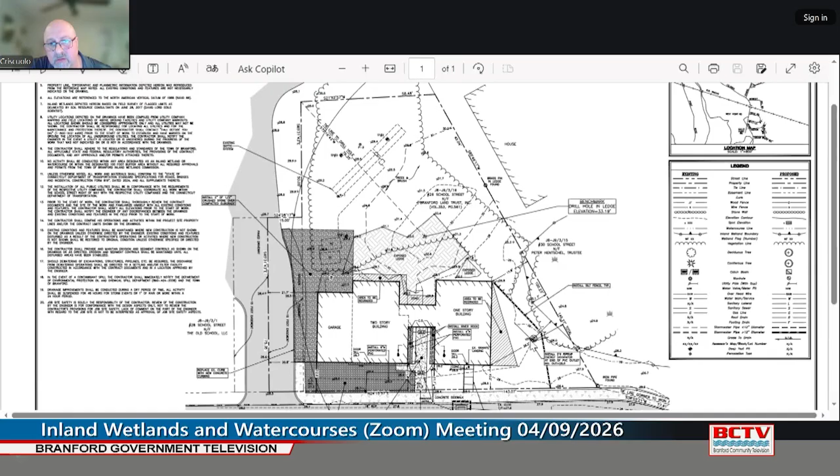So what we're planning on doing is putting a landscape stone strip, or more of the Stony Creek gravel stone strip here with a perforated pipe underneath, which will connect to a perforated pipe underneath this gravel area here, which eventually runs down and outlets over in this area adjacent to the wetland.

Now this pipe sits in a crushed stone layer, and it's flat through here, then there's a quarter inch pitch through. So these stone layers have to saturate and fill up before it finds the holes in the perforated pipe, and then kind of works its way down to the end of the PVC, and we'll have a riprap, like a bowl so to speak, a riprap energy dissipator, so there wouldn't be any erosion at the end of it.

Truthfully, during this saturation time, when the stone has to saturate for the pipe to start to flow, some of it will be getting into the ground as well. So I suspect there will actually be very little coming out of this pipe.

But we did do a drainage analysis that analyzed the whole affected area of the site, basically this whole front half of the site. Some of it goes this way into this gravel and always has, and into the driveway over here.

Some of this area did drain off from the curb cut into the road, a very little piece of this driveway. And then again, this area in the front here and a little bit right up against the back of the building would kind of run around the building and over here.

So the net of all that, when I ran hydrographs pre versus post and added them back together, the net is we're actually reducing the runoff here.

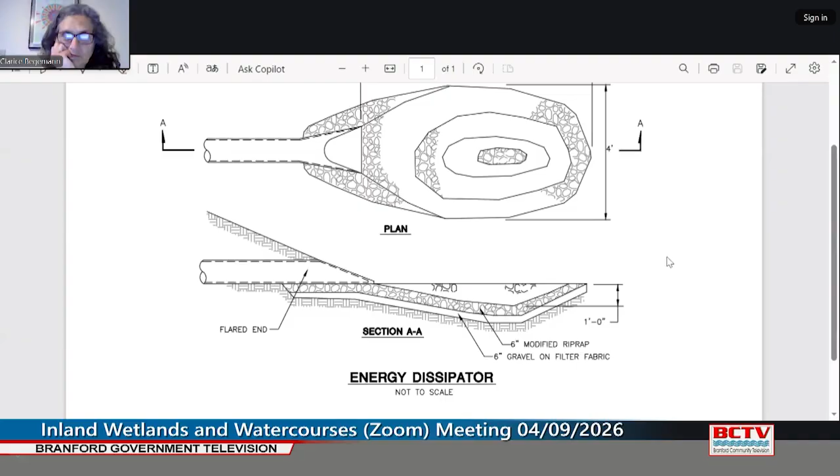This is the detail at the end of the pipe. There'll be a riprap bowl, more or less, to break any energy coming out of the end of this pipe. Again, we expect very little flow.

Where did I go? There is one other interesting thing I found today that I did want to share. Share screen. Share screen. BLT. This is a map from 1980.

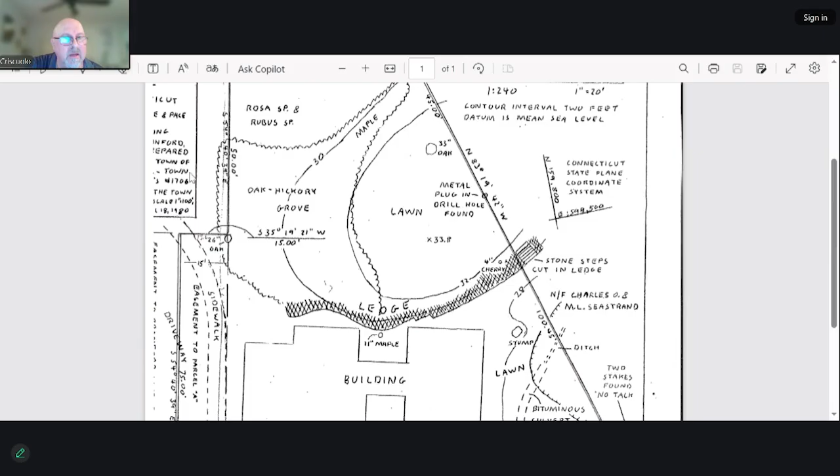It was cut off, but you can see it was 1980. I think it was done by somebody in the town - it might have been the town engineer at the time - but this was the building. You can see the ledge in the back and the property line over here.

But here, interesting to note, this may have been before they put the drainage in the road, but there was a bituminous culvert that ran right in that same area from the road into a ditch and then into that wetland area on what was Sea Strand property, what is now Hentschel.

So we're talking about very little flow, an area that had historically been disturbed, and it doesn't appear that we're going to really have any negative impacts at all on that wetland area. And I guess I'll take questions, because you have heard some of this before.

This is Commissioner Baskerville. Is there an easy way to describe the change in the direction of the drainage from what is current to what is proposed?

Can you pull the site plan back up? That will help. Yes, thank you, share.

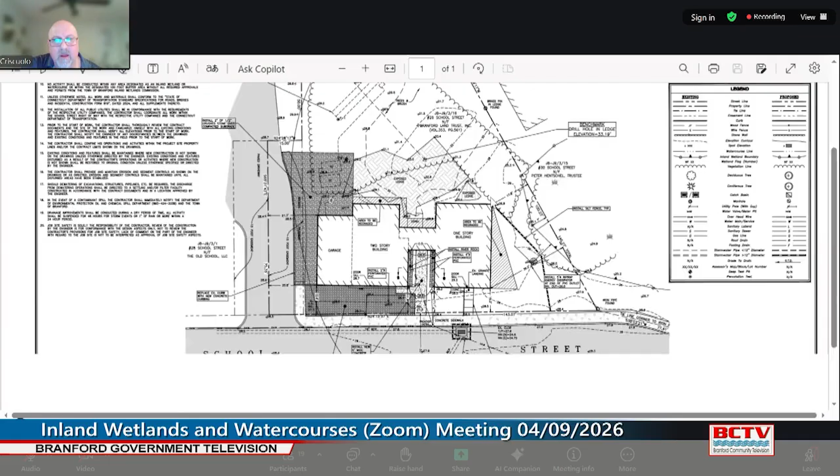I do have a roof plan, but there's a ridge that runs down this building here, and there's a ridge that runs down this building here. So the left half of this all runs to the left, and this portion here all runs to the left. The only gutter on the building currently is right here, and there's a downspout that discharges into that stone area.

Again, this is the same thing. There's a ridge that runs through here. The right half of the building already runs this way without any gutter and kind of runs off in that direction. This piece in the middle is a single slope, so you have a little bit of roof on this side and a little bit on this side that drain onto it and then runs into the back.

They'll get a little bit more. On the document in OpenGov, the sheet I'm looking at is 1 of 2, but I don't see a 2 of 2. Oh, I'm wondering if it was mislabeled. There was a 1 of 1 drainage and a 1 of 2 - they were mislabeled.

But the 1 of 2 has some red designations on it in terms of direction. And I didn't see that on the site plan I'm looking at. No, that was just for the drainage report. I don't think I have that with me. Jamie, can you put that on the screen?

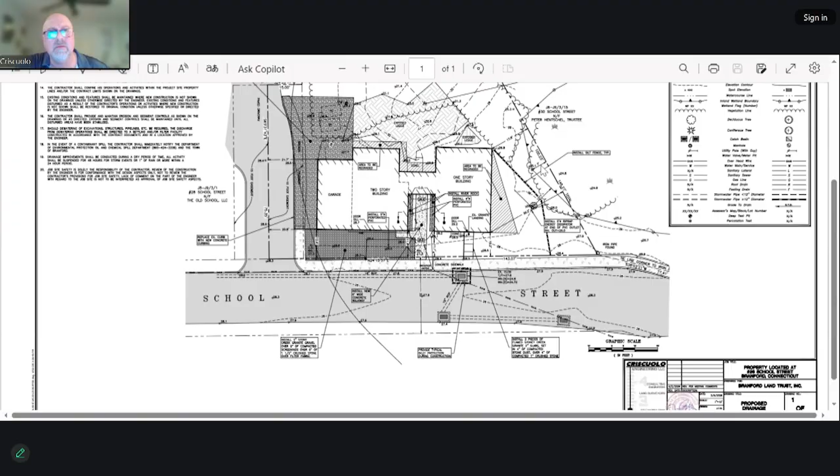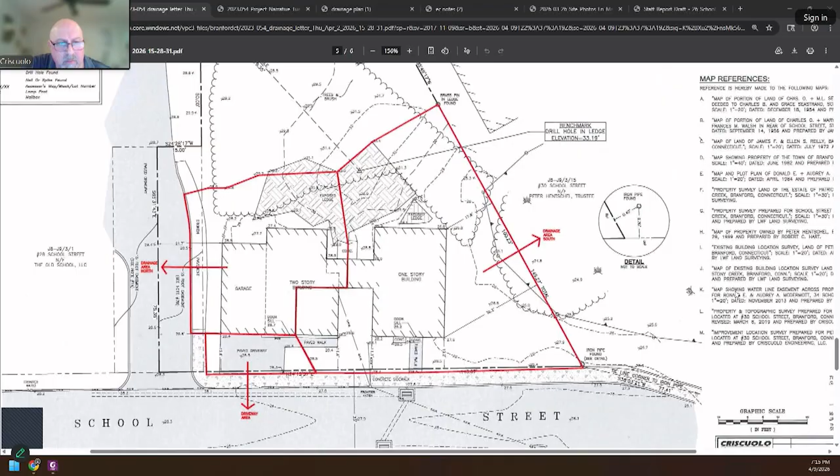Basically, where that bridge piece that connects the 2 buildings is, that ridge really runs right up to the back of that building and kind of splits it. So whatever runs off on the left side goes around to the left, and whatever runs off on the right side runs down to the right.

Commissioner Baskerville asked: are we changing the roof peaks? No, we're not doing that. It's just because they'll be adding a gutter on the back of that connector piece, that they'll be grabbing a little bit more roof that'll be going to the right instead of the left - only about 50 or 60 square feet difference.

Gotcha. Okay, thank you.

This is Commissioner Boda. Where is the energy dissipator on the site plan? The bowl? If you go to the next page, it's right there, in an area that's already lawn right now.

So we're not taking any vegetation out here. This is Commissioner Boda again - so that is the primary thing that is the driver for the permit.

That's correct - that, and the triangular area there. Actually, because of how small this site is, the whole site's basically in the review zone. But that footing drain outlet, or under drain outlet, and a little bit of filling they're doing up against the building - because there's a depression up against the stone foundation that collects water before it spills out and creates moisture problems.

And then the little hatched area in the back is just some local grading to try to get the water away from the building.

And then in the front, they're taking the pavement out that exists and putting in Stony Creek crushed stone, which will have other stone layers underneath it to make it drivable. So they're making it more permeable, because we're putting 6 inches of stone where that PVC is going, and the amount of stone just in the front is about 120 cubic feet of storage that doesn't exist now.

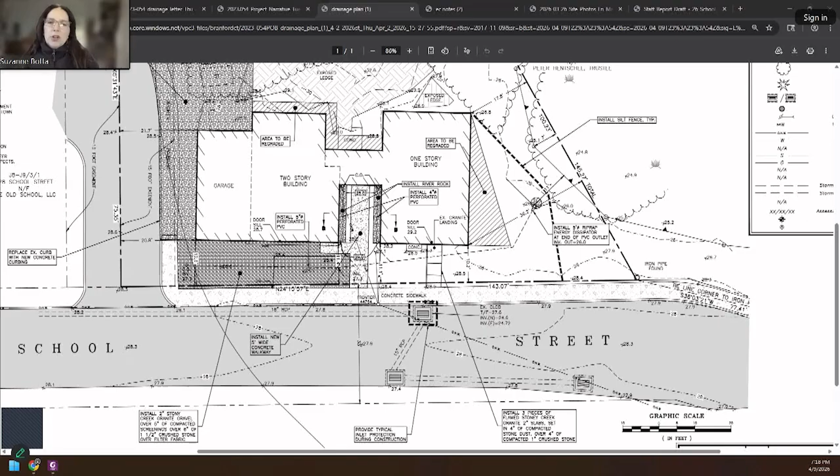And this is Commissioner Botta. What is the distance between the discharge from that bowl to the edge of the wetland, and then it looks like there's a tree line in between?

Is that correct? Yeah, there's some vegetation in that wetland that kind of crept out. At some point there was quite a bit of Phragmites there, but there's some other brush and stuff in there now. I think they tried to mitigate it. I think Mr. Henschel tried to get rid of the Phragmites over the years, but you could see it. The hole in the front here is, I think, because they were trying to get under the building, but farther on there were always these depressions, because I think it was washing under the building or something.

This is Commissioner Bassermann. I believe when you talked about the sidewalk, Mr. Preddy, you said there was a lip along the side closest to the building. Is that preventing flow to the sidewalk, or does it look like the topography slopes toward the rear anyway? If you look down the sidewalk there, past the pole, you can see that whole area drops to the left, and then the sidewalk's dead flat. So nothing's really going over the sidewalk there.

And to that grass area just before Peter Henschel's barn, or garage, the whole area there, that grass area is very flat, but it does eventually run toward the south, toward that wetland, after it saturates everything.

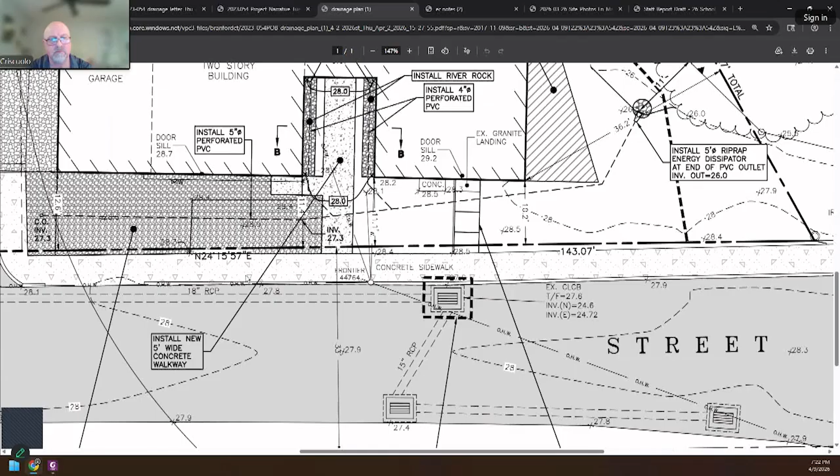This is Commissioner Bassermann, any other questions for Mr. Preddy?

Jaymie Frederick, Wetland Agent. I'll just request that we receive a copy - if you can email Olivia or myself the detail for the outlet structure and the map from 1980, so we can add that to the file. That would be appreciated. Yeah, the detail I'll put right on the plan, Jamie, but I'll send you the other map too. Okay, thank you.

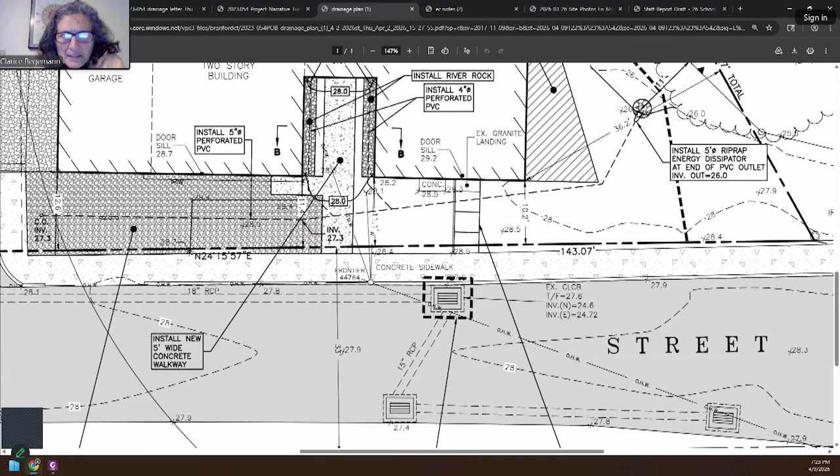This is Commissioner Begemann. Jaymie, in your staff report, did you mention something else about another silt fence? Not this staff report. Okay.

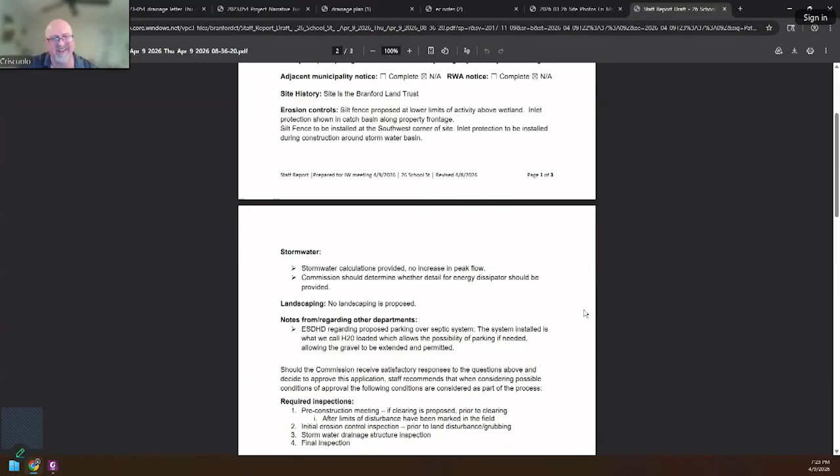This is Commissioner Bassermann, that's actually a good segue into the staff report. You want to bring that up, Jamie? Sarah, are you seeing it? Yes, we are. All right. Jaymie Frederick, Wetland Agent.

I'll kind of skip over what I feel like we've already gone over. We do have the silt fence. There is the inlet protection proposed for that catch basin we were just talking about. We've received the stormwater calculations the commission requested at the last meeting. No landscaping is proposed, however they're also not really impacting any existing landscaping or vegetation other than lawn. East Shore reviewed the parking relative to the septic system on site and didn't have concerns.

So I would recommend that the commission consider a pre-construction meeting, initial erosion control inspection, stormwater drainage structure inspection, and final inspection. As possible conditions for consideration: energy dissipator details shall be provided, which you got to preview this evening; gravel and crushed stone shall be placed such that it is contained to the areas shown on the site plan to help ensure there's no migration; area to be regraded shall be stabilized with vegetative ground cover prior to final inspection; and the energy dissipator shall be monitored and maintained on a regular basis to ensure proper function, along with standard conditions and general provisions of all permits.

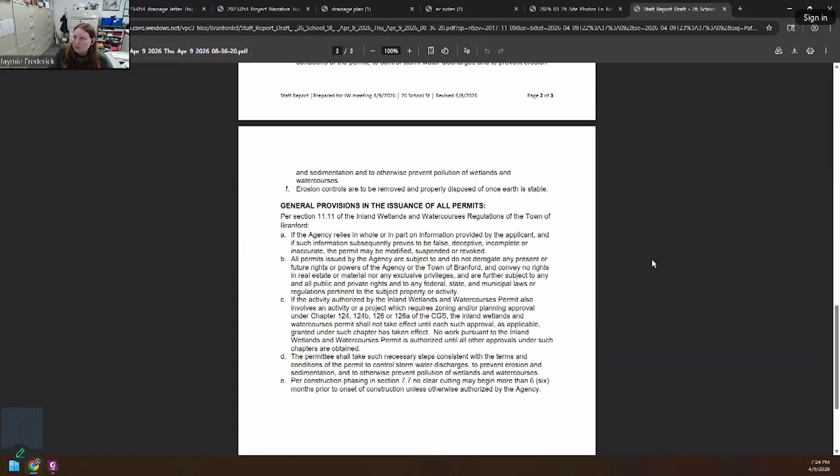Any questions? Any commissioner modifications or additions to that staff report?

Commissioner Gokowski, do you have something to add? The question is, are they on a time crunch for this project, or do they want to get it done as early as they can for the season, or do they believe they're ready to move forward? I believe they need to get some of this done so they could work on the actual renovations of the building. Okay, thank you.

This is Commissioner Bassermann. We heard about the new drainage calculations that seem to satisfy the questions from the commission at last meeting, going over to staff report. Doesn't seem to be any addition in terms of considerations. This seems to be an application that's ripe for a motion.

This is Commissioner Begemann. I'll make a motion that we approve the wetland application 26-6, 26 School Street drainage improvements, according to the staff report revised 4/8/2026, with the possible conditions, standard conditions, and general provisions of all permits.

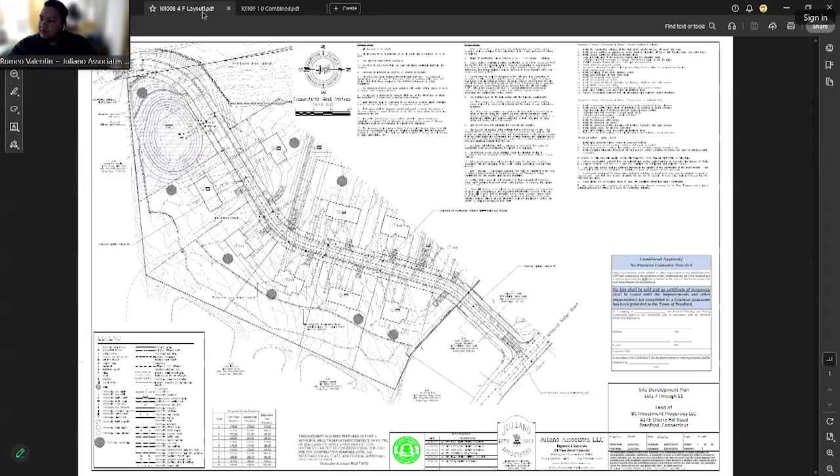This is the approval. So right here is lot 9, and then this is the basin. Wait, I'm sorry, this is Commissioner Botta. We look at a lot of plans. I'm sure you've been looking at this one plan a lot, so I'm going to need you to slow down a little bit in terms of orientation. So what lot number are we talking about? Lot 9. Okay, and then on this zoomed out, where is lot 9?

So I don't know if you can see it... okay, yeah, this here. Okay, and so it's connecting to the drain here, which is going to come down Cherry Hill Road extension and come into the basin. I see. So although our dwelling is bigger, we don't want to add more water into the basin. That's why we have a portion of it coming to the catch basin, and whatever the basin can't handle, we're letting out the back of the property to grade.

And what kind of underground system is that? It's a Cultec R-330XLHD. So tell me about how it functions. Is it infiltrating? Is it holding and releasing? What is it? It is both infiltrating and then holding and releasing.

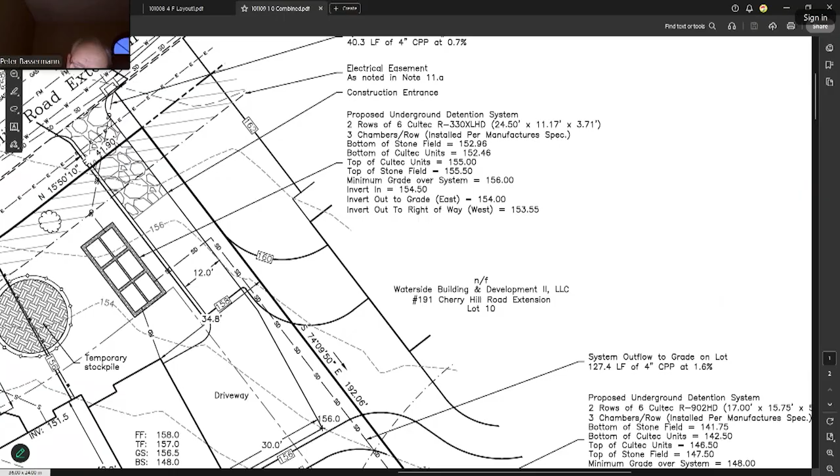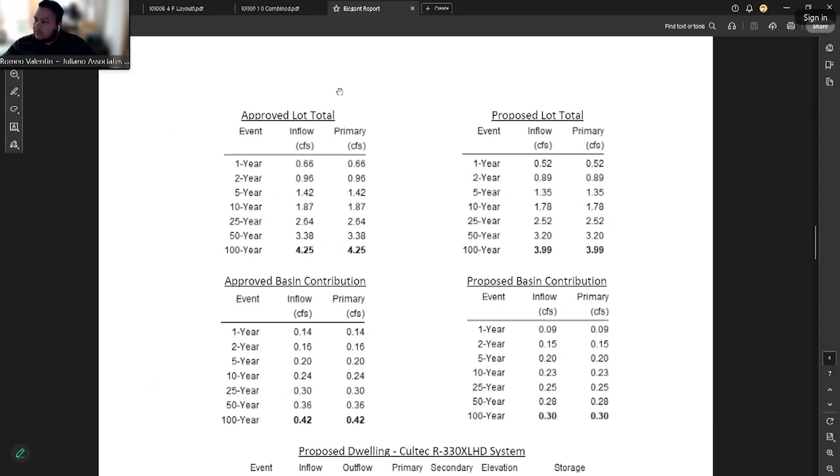Can you see the report? Yep, okay, so we're going to scroll down to these tables here. This is the approved lot totals for the entire site, and then our contribution to the basin itself versus what's proposed now. So for a 100-year storm for the entire site, we're going from 4.25 cubic feet per second to 3.99. And then to the basin itself, we had 0.42 cubic feet per second, and now we're down to 0.3.

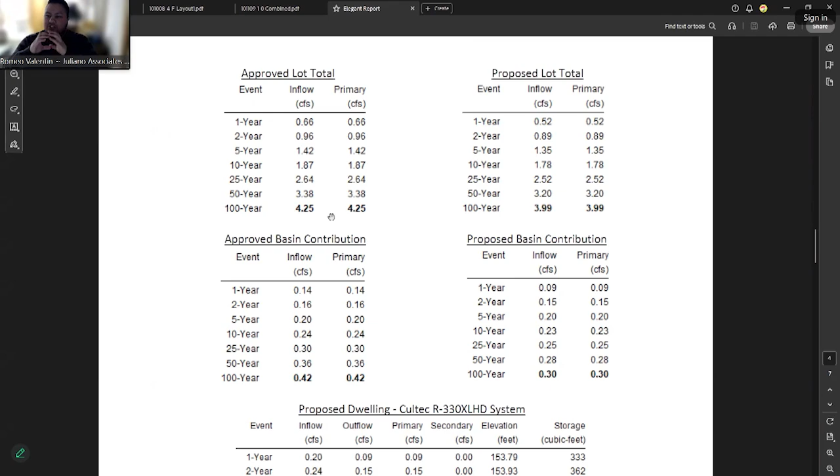Commissioner Basserman asked, did you say for the entire project? Yeah, so for the entire site, we have a portion going towards the road, which is going to the basin, and then we have the portion that's outletting in the back to grade, which is basically going to the wetland area. We're reducing for the entire site as well as our contribution to the basin itself. But just so I'm clear, this is not lot 9 that I'm looking at? No, I'm sorry, this is for lot 9. We did an analysis for each lot. Okay, each lot, thank you. Yes.

Thank you. Commissioner Bolla, can you go back to the plan? Yes. Okay, so you talked about the Cultec in the front, and then what was for the back by the pool? You have a similar underground detention, some infiltration. Yeah, so it's basically a Cultec system, a slightly different model, the R-902HD, which the HD is the heavy duty portion of it. It's going to collect via this curtain drain you see here.

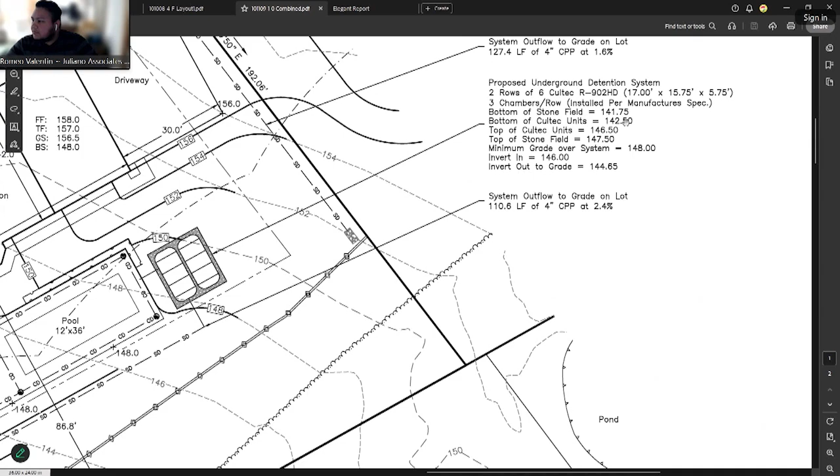And then it basically works the same way because it's a different model, it has a little bit more to it, so it has some end caps, basically collecting more water. Again, it has a half a foot of stone below, half a foot of stone above, and then it's wrapped around. As you see the hatching that's around here, it's encasing the entire unit. And then the bottom is 142, and the invert out is 144, so again about 2 feet of retention before outletting to grade, basically just reducing how much water we're letting out of the site.

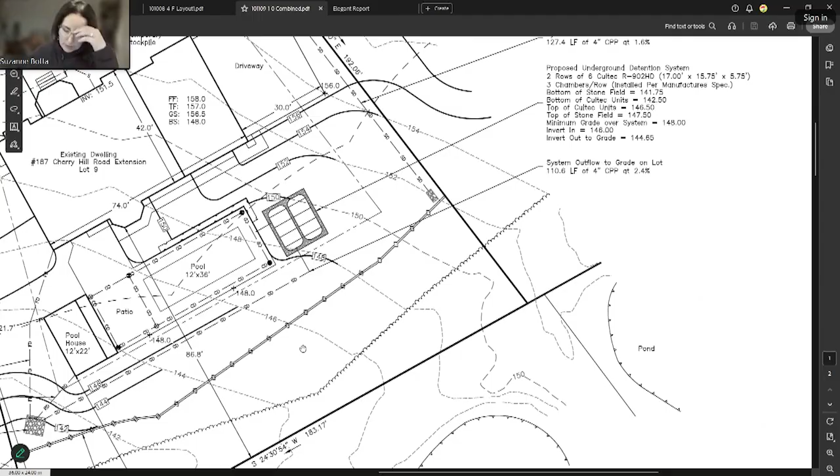And this is Commissioner Bolla: can you talk about during construction? I saw you've got a stockpile marked. With putting those Cultecs in, and some of the other work being proposed, can you talk about the construction process and sediment and erosion control measures during the construction process?

Okay, so first I will say that for the approved subdivision, I believe there's already silt fence out there, so we would probably maintain whatever silt fence is out there and add as needed. That's why I have this proposed here. Before anything commences, we'll go out and stake out where silt fence needs to go, just to make sure we're not letting anything out into the wetlands. Stockpiles, we always include them in the plans; however, we know that when they're actually working out there, sometimes they make smaller mounds in multiple places, but this is basically where we're proposing it to avoid it going into the wetlands.

So they'll do the house, and all the stockpiles have silt fence around them in our proposal, so that should avoid any kind of erosion issues. And again, I will add to the plan the silt fence along the property line between lot 8 and 9, which will further reduce erosion going onto lot 8.

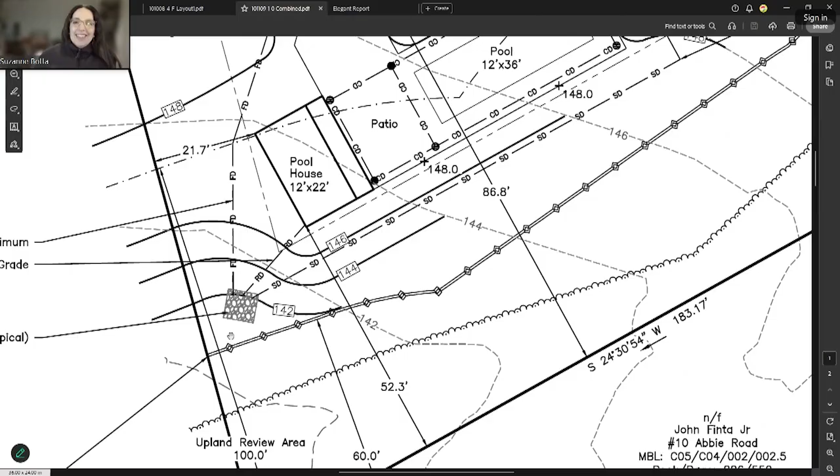Can tell you what we've seen. Jamie Frederick, wetland agent. I'll just note that on the staff report, I've added standard language that the commission usually utilizes when there's a pool, that addresses discharge from the pool shall not be within 50 feet of any storm structures or the wetlands. I feel like I'm missing something, but we can take a look at that when we look at the staff report.

Well, I don't think that outlet's meant for dewatering the pool, and arguably shouldn't be used for dewatering the pool because it's part of the stormwater system. So that riprap apron is meant to handle the footing drain and the pool house, and what's overflowing from the underground detention system, which is going to be metered out based on the pipe size. So it's not going to be a huge volume of water at a given instance.

It's a 4-inch pipe from the Cultec system, so very small pipe, not a lot of water. We're not talking about pool water, but it's just the runoff that's collecting on the patio from rain.

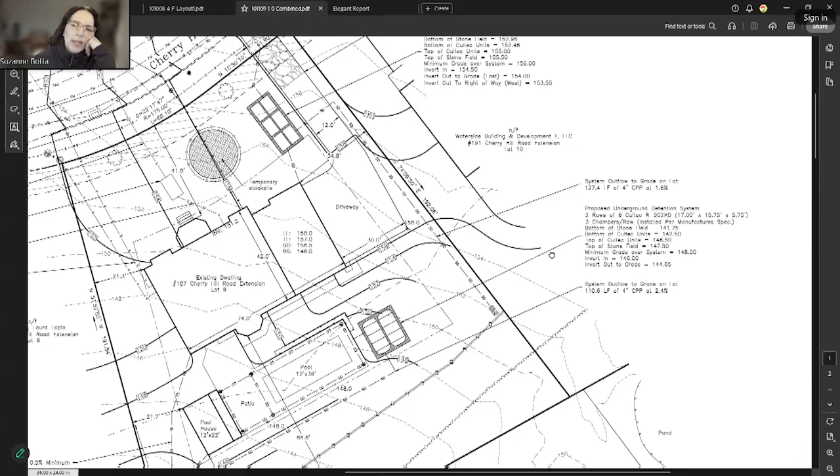Commissioner Bolla: Is there anything at the end of the driveway that would direct it, or is it sheet flow off the back of the driveway? It's just sheet flow, it's not being collected in any way. Interpreting correctly, it looks like it would sort of flow toward that detention basin-like area. Seems so, it would just kind of go over it, but there's grass on top, so it's basically going to flow over it and come down in this direction to the wetlands.

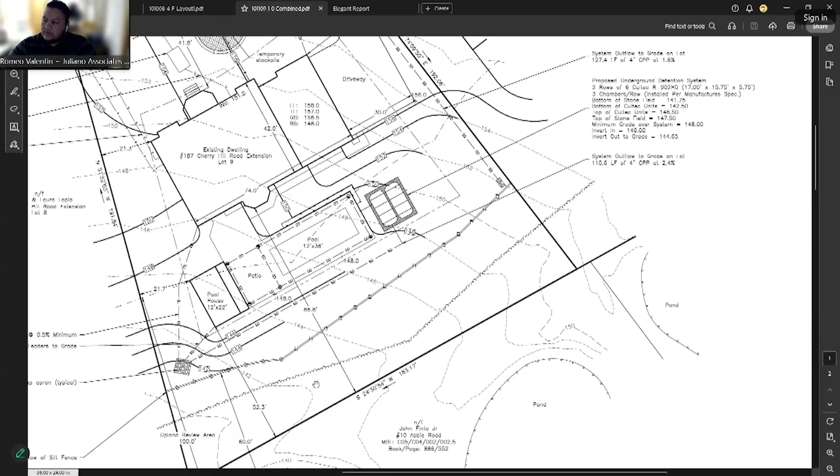So it won't actually go into our Cultec system? It will go into the Cultec system. Is that what you said? It will not, it will not - can you pull up the specifications for that system? So you said there is crushed stone around it and under it? Yes.

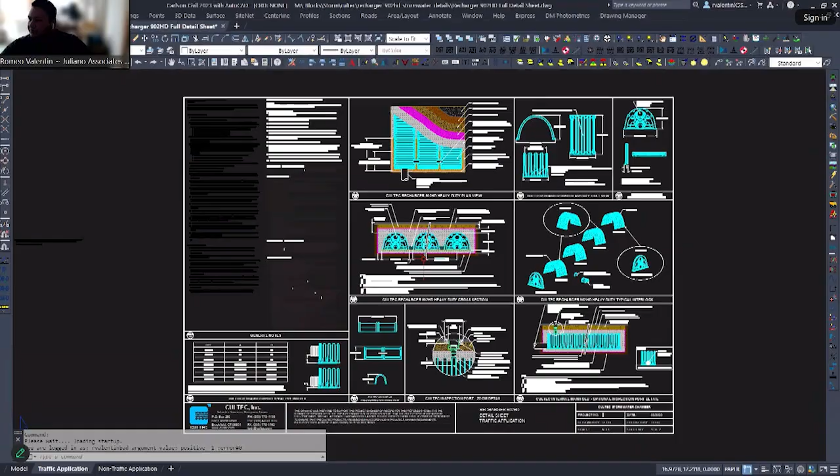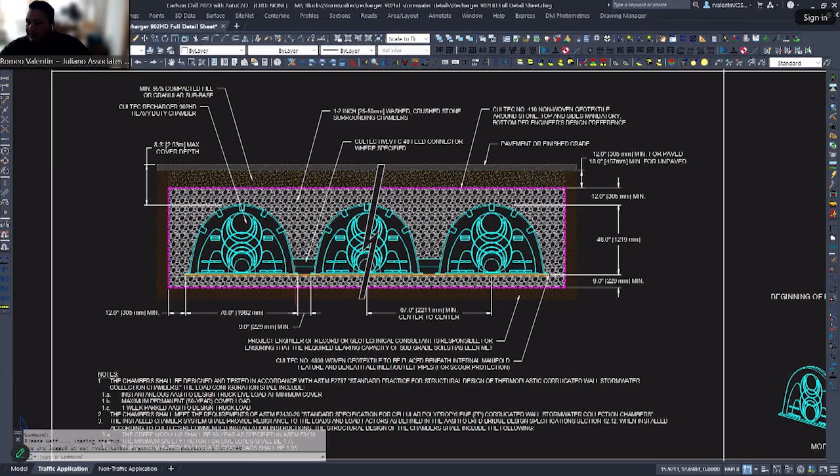Let me just grab the Cultec. Can you see this? Yes. Okay, zooming in here, this is the side view of it - we have gravel around the entire system. This is the system being used for the pool. These sections here are the actual systems, and then we have gravel below it, above it, around it, in between. If you see here, this is the actual system, the pieces of it - it's basically a tunnel, and underneath it is the gravel. Looking at the side profile again, you see this is gravel, all around it.

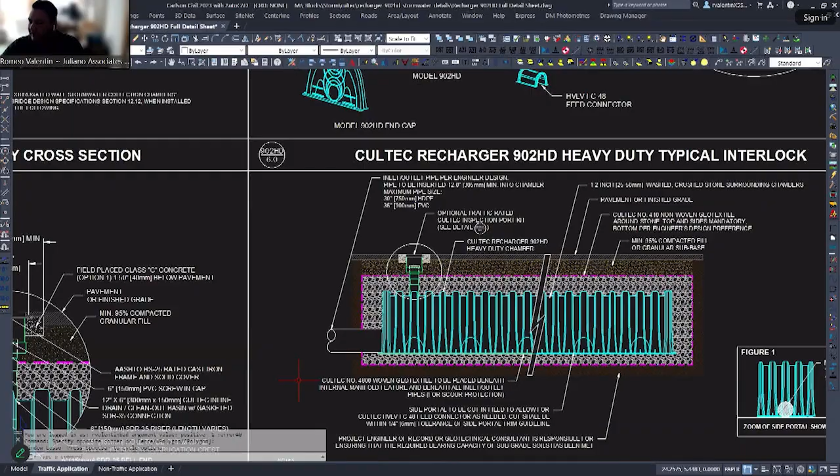So this is pipe - here would be a little bit higher. The pink line around the outside of the gravel, is that just a visual, or is that some other component of the system? I believe there's a geotextile fabric around it. Does it appear to be calling that out? Let me see... okay, the geotextile fabric is here, I believe, and this is the area around the stone. Oh okay, right here - this is the fabric that's going around the stone to keep everything together.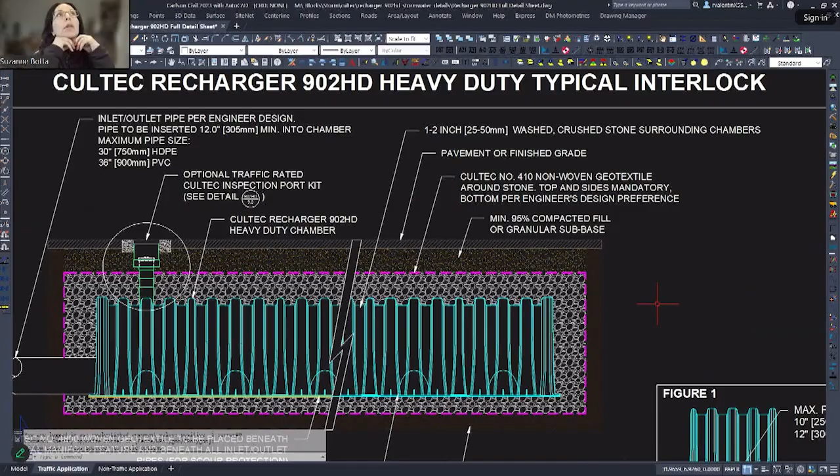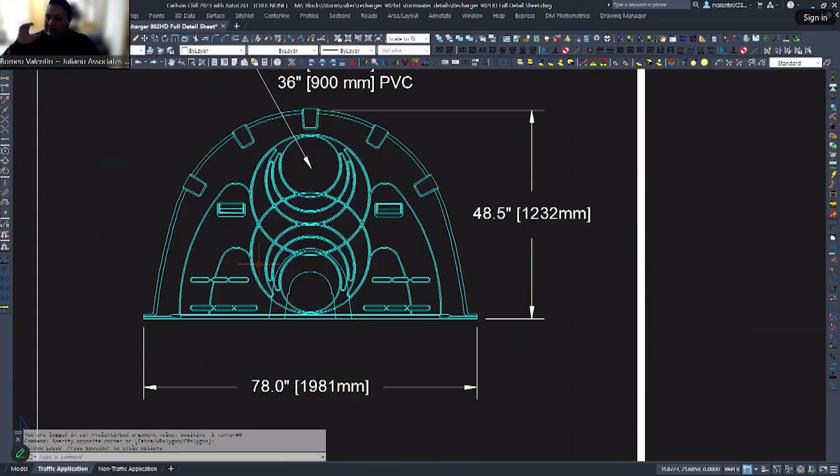Commissioner Dolla: The entrance to the inside of that - it's not perforated in different places, it has specific entry and exit points? Correct. So if we see this one here, at whatever height you want your pipe, it makes a hole through that section, and that's the elevation it'll have for your pipe to come out. Everything else is sealed - it's a plastic system, so everything else is sealed plastic.

So also, if you could see this here on the side, there's no openings anywhere except for wherever you put in the pipes.

Commissioner Dolla: if we go back to the site plan with the grade, that water is going to sheet flow over the system, which is full of gravel with a geotextile fabric. So it may infiltrate around, but not in the system. Correct, so it's basically if we have plastic, any water that will infiltrate into the ground will go into the gravel and move around the system because it's plastic, so it won't enter it.

Commissioner Dolla: So once it's in that system, the one in the back by the pool - you said 6 inches of stone underneath. So there's stone, and then the system starts, and from the bottom of the system up to the pipe it's open in the bottom.

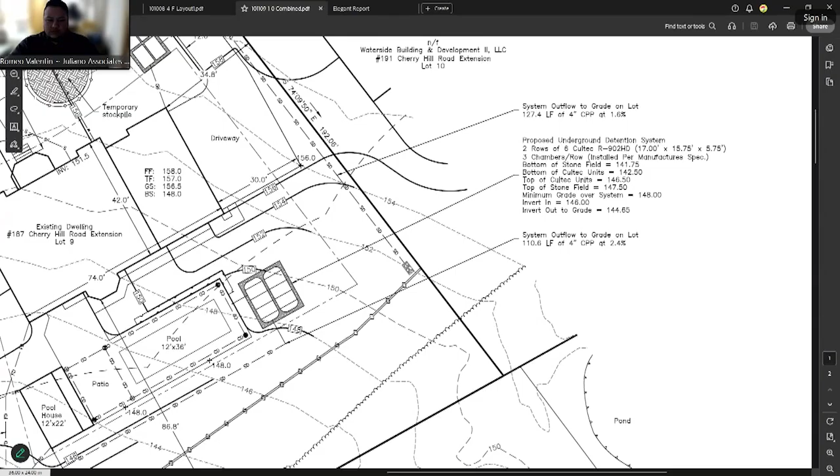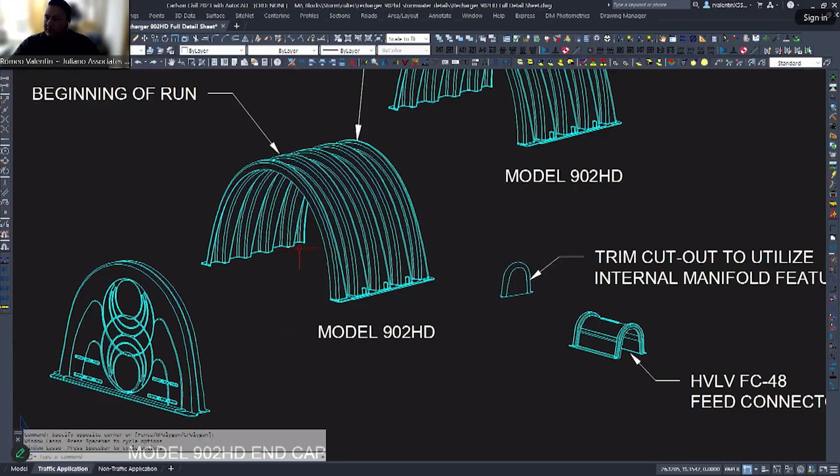I can show you that again. Let me see. So this one here - you can kind of see it's an open bottom, it's just a sitting dome on gravel. Correct. So it's going to collect up to whatever the height of our pipe, and it's going to collect from here into the gravel. So the gravel will be filled with water, and then up to the outlet pipe it will all be retained.

Commissioner Dolla: And you have not done any percolation tests back there to see? You don't know where the water table is? I'm not aware of the tests that were done.

There could have been some for the other lots, considering this has been done for lot 11, which is two lots over. So they could have been done with what they were doing there, but basically the same system was proposed for lot 11. Commissioner Vogt: It seems prudent to know where the water table is there.

I mean, I understand you said 6 inches? Yeah, we've got 6 inches of stone, and then we've got - what did I say - a foot, 2 feet, bottom of the Cultec is 142.

And how far do you have to dig down in order to get the system in? The system is 5.75 feet tall, and then I have top of grade 148.

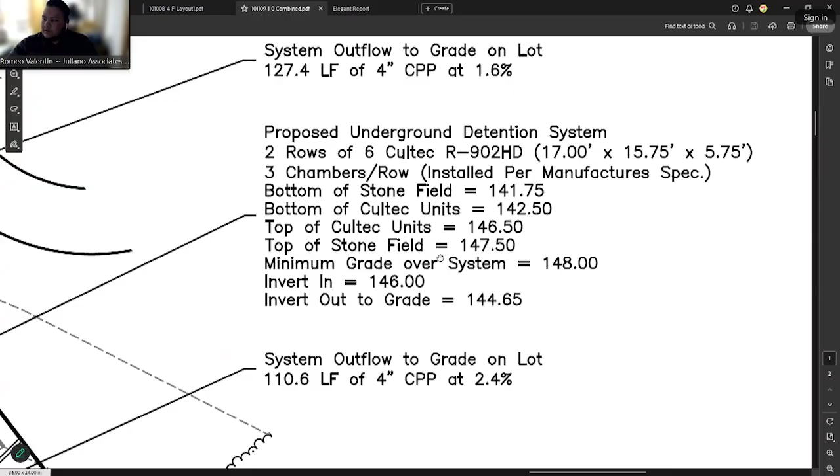So we've got another 6 inches above the stone minimum of ground cover. So if we're looking at the 148 contour, we have 6 inches above the gravel here, and over here we've got 150, so we've got 2.5 feet of ground cover above the gravel, or 2 feet above. It's a lot of digging.

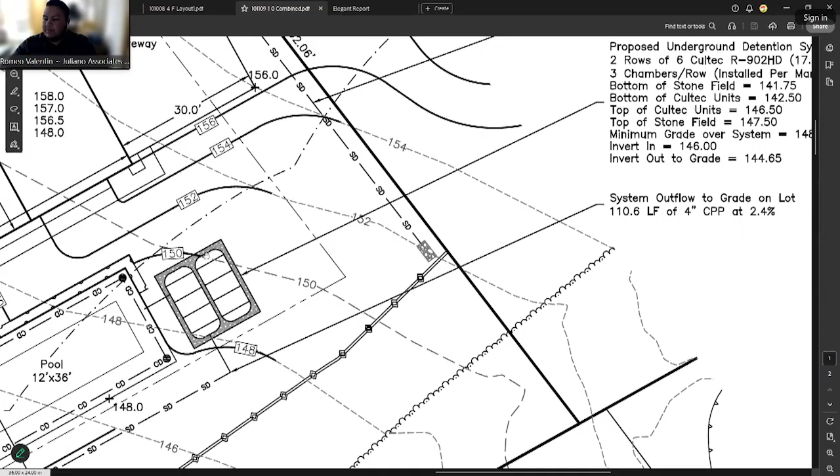Yeah, there are different systems, and different heights of each of the systems, and depending on how much water we need to retain, it changes the depth of the system. So this is just a system that was required for the amount of water we were trying to hold. As you can see, this system here is only 3.71 because we didn't need to retain as much water into this system.

But again, I will say that there is a basin down at lot 7, and I don't think they've had any issues there with water tables and stuff. But I'm not super familiar with the proximity relative to the wetland in comparison to lot 9.

The basin on lot 7 is below lot 9, about 250 linear feet from the wetlands. So it is quite a bit further, but like I said, I'm not familiar with what was done for the total site subdivision.

I can only compare to the approved plans. Commissioner Papantonis: I have a question - because lot 11 is higher than lot 9, correct? Correct. And lot 7 is below it. Correct. And the wetlands are below, there's wetlands below closer to lot 7 and all around there because that's the water company property, right?

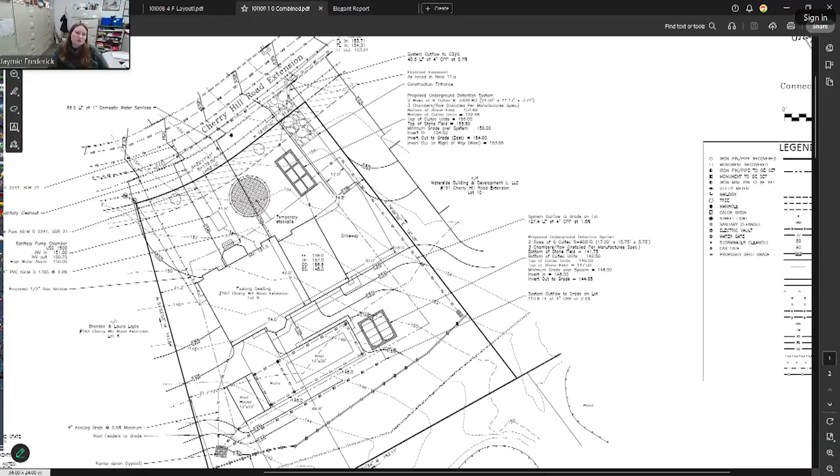Do you have that subdivision map you can pull back up, Romeo? Yes. So this, and this are the wetland areas. This is lot 9 again. But aren't there more wetlands further down? Way further down, I don't have anything located on here on this map.

All right, so you've got water flowing back to the wetlands and water flowing toward that retention pool off to the left of the map. Yes, so the portion of water that we're sending to the catch basin here is draining down and coming into this basin.

This is Commissioner Papantonis again. So how can you do this without a perk test? I mean, this is lower and the water's going down. I don't understand why you wouldn't need it.

Jaymie Frederick, the wetland agent. I didn't put it on the staff report, but the commission has on some of the other lots requested perk tests prior to installation to confirm that the assumptions are going to be met. Certainly could be something you could look to do.

Romeo, could you also point out where the 100-foot upland review area is on lot 9? It's this line here, this dashed line.

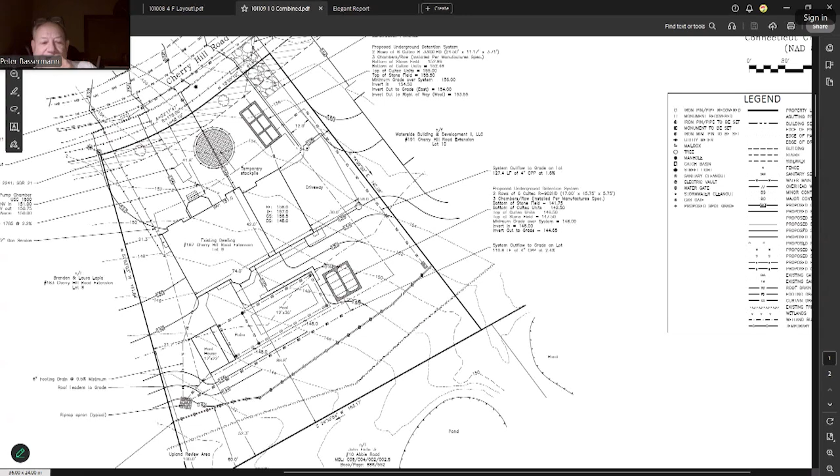Commissioner Bassermann, back to the driveway. Why wouldn't I want, if I was the homeowner, a curtain drain at the end of the driveway? You've got 1,500 square feet or thereabouts of bituminous surface.

Why wouldn't I want a curtain drain that then feeds that system? Well, because that area is going to be pretty, if it's just sheet flow, going to be pretty soggy. I wouldn't. The water's not sitting here. We don't have any low spots, so the water is going to drain off of this grassed area here, as long as it's not saturated. Well, correct.

I mean, why a homeowner wouldn't want it? Quite honestly, it means another system in the ground, it's collecting more water, and we don't want to let no water off the site, like the previous comment about drying out the wetlands. I would say we would be reducing a lot more. And again, you could collect everything, the entire impervious surface increase, but we only do the amount that we need to reduce compared to the approved plans in this case.

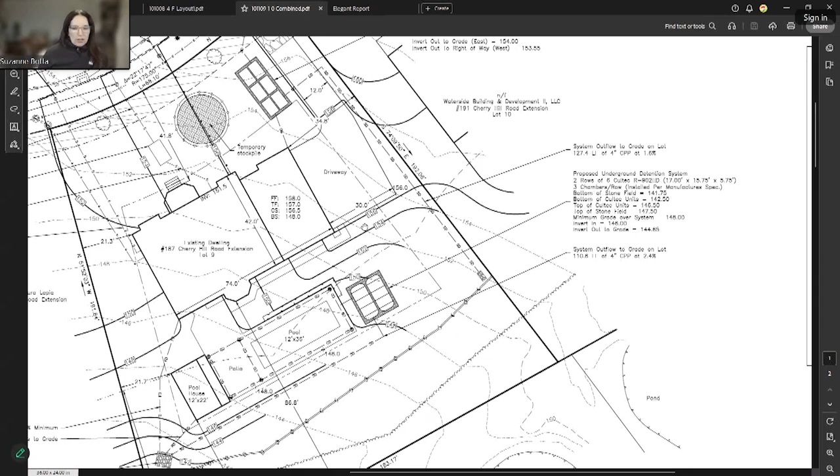I think you've summarized everything. We've got the silt fence comment along the shared southern property line. I did also throw in the staff report that the erosion control shall be inspected weekly and after every storm event.

I don't think that groundwater has been an issue on the overall subdivision site. However, the site does get very wet after a storm event. So making sure that the erosion controls are in good shape so that they don't have to make emergency repairs right after a storm event is important.

And then the pool water comment about not being drained into wetlands, watercourses, streets, or within 50 feet of any stormwater system.

Commissioner Bergmann: Jamie, what do you mean the site gets very wet after a storm event? Mostly because the subdivision site was stripped, basically bare dirt condition, large expanses, it's all a hillside. So it's a lot better now that some of the lots have been completed.

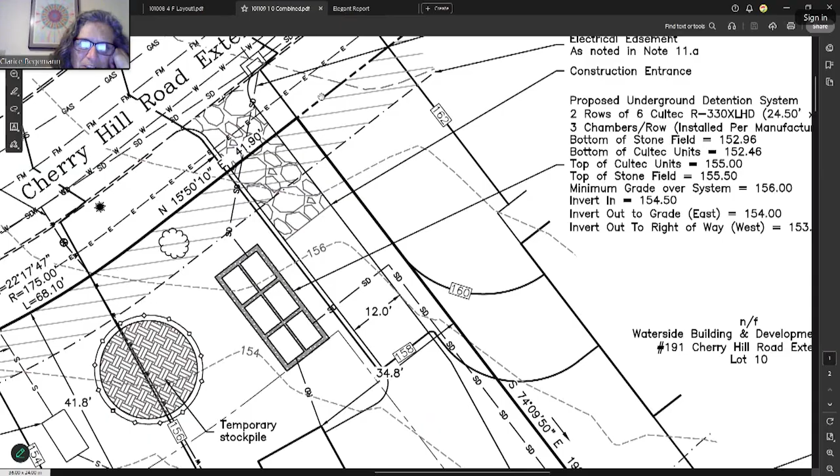Okay, that's the construction entrance. And the elevation naturally would be 156 where your cursor is right now, correct? 158 here. That's 158 there? Yes. Oh, okay. So and then it goes back up to 158 further down? So 156, 158, 160.

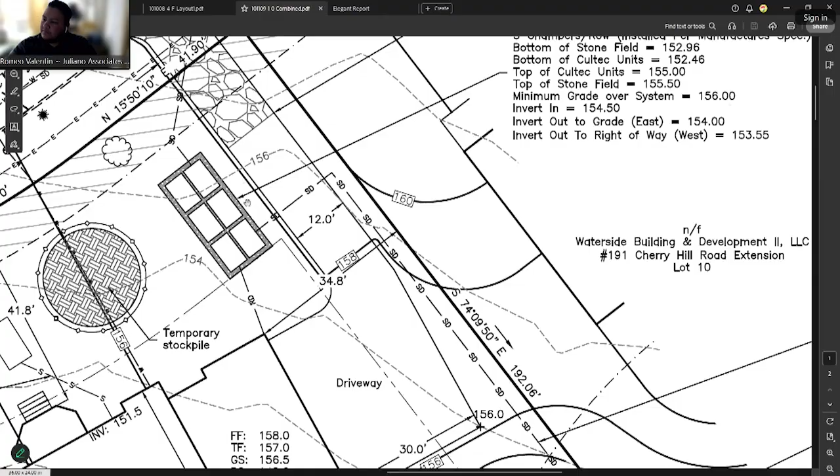And the new contour is going to be 160. Okay, 160 comes along the property line. Yeah, and then 158 hits the house and then comes up. Oh sorry, right here, this is the 158. So yeah, the whole driveway this side is 158, and then this side is 160. So this portion of it will technically come this way.

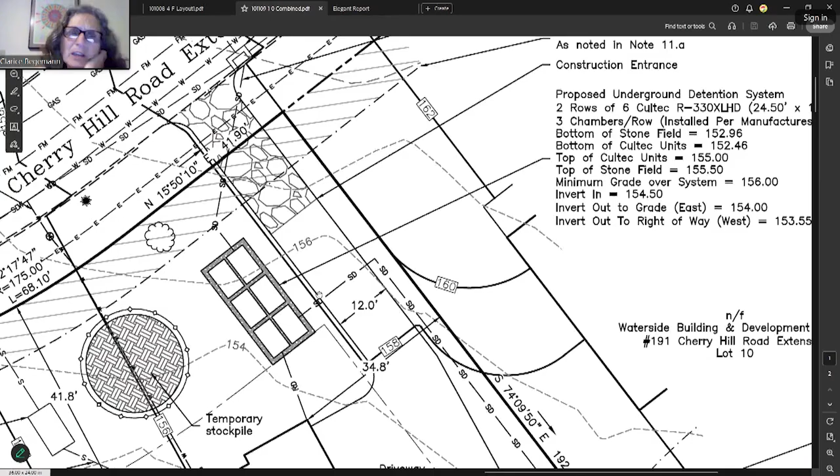But again, all of this comes around and wraps down anyway. Commissioner Bergmann asked about the double line on the left side of the driveway. The thinner line is the driveway, and the thicker line is the contour line, at 158. In CAD it's actually shown in colors, but putting a big colorful thing on here would be a little confusing.

I just thought of this, not that it changes anything, but lots 8 and 10 have already been developed, the houses are up, and they haven't hit any water issues. That doesn't clear anything, we can still do a perc test. I just wanted to make that known, since they've been developed on both ends and we haven't seen any water issues to our knowledge. But again, we like to have perc tests done before things happen. If not, we use the lowest rate we can, sometimes 0.1, which is basically clay, basically zero.

Commissioner Bergmann asked, when you put in an in-ground pool that goes down maybe 12 feet, do you have to do perc tests in general for in-ground pools? I don't know the answer. I also don't know the answer. I'd love to assume the pool company does that as part of their regular installation, but honestly I don't know. I do know they have gravel around the pools, but that's all I really know about the pool itself. Commissioner Papantonis asked, do we know how many gallons the pool is going to be? I do not, I don't have the depth of the pool, so I can't give that answer.

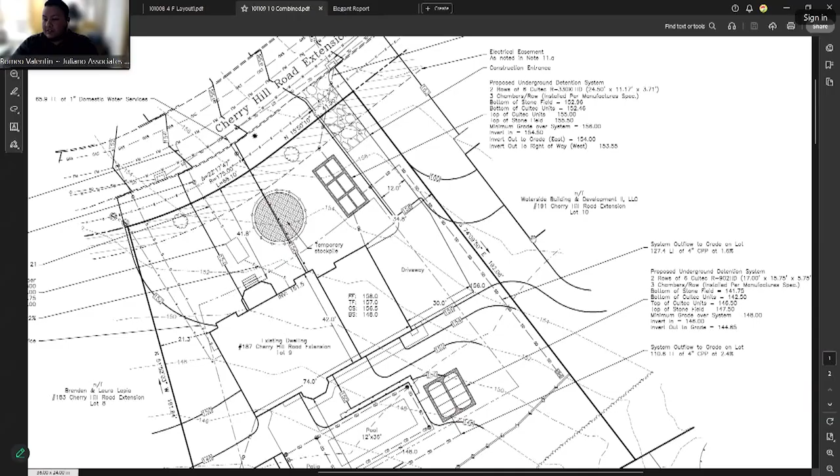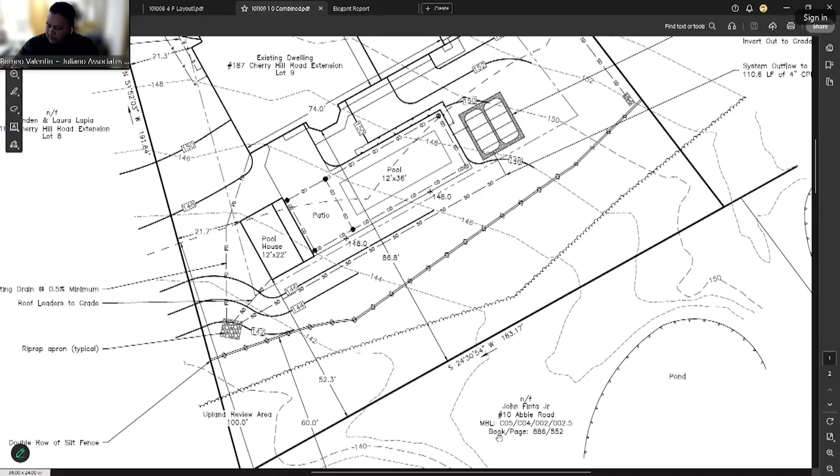Commissioner Bolla asked, can we go just a little below the pool, between the pool and the wetland, and maybe this is about the subdivision. We get so many applications they all start to blend into one. Is this the space between the back of this property, the upland, the upland review area, and that wooded line that's shown? Is that now conservation, or land trust, thinking about this 4,000, almost 5,000 square foot house. I'd wager they're going to have a very shiny green lawn. Seems like a safe bet.

Is there some kind of, maybe this is a Jamie question, land trust or town open space around the pond? What is after that? The ponds are off-site, on other residentially owned properties. There is no conservation restriction on the subject parcel that this application pertains to. There is notification on the deed that there is an upland review area, but that is the extent of anything on the land records.

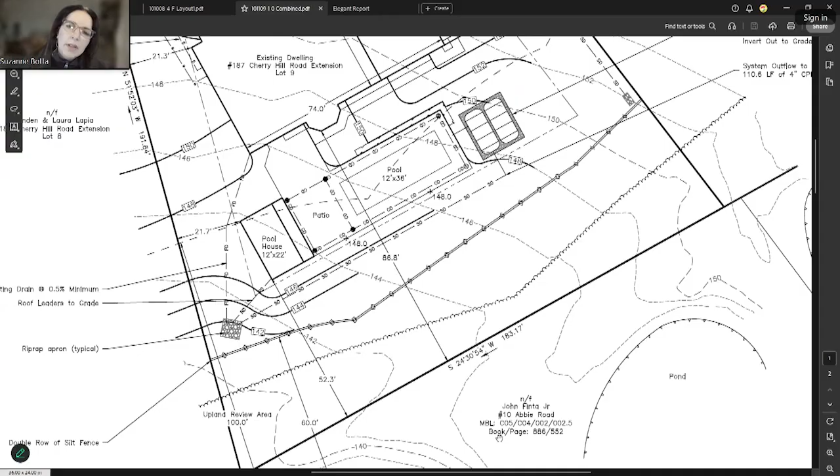So what is the distance, I can't see everything on the map since it's zoomed in. It's 60 feet from the wetlands at its closest point. What is the silt fence for? Have we done something in the past where we put up markers or similar just to indicate that? I'd say this would be the only lot in the subdivision required for that, and this is the second-to-last lot the commission is reviewing. Were all of them that close to the pond?

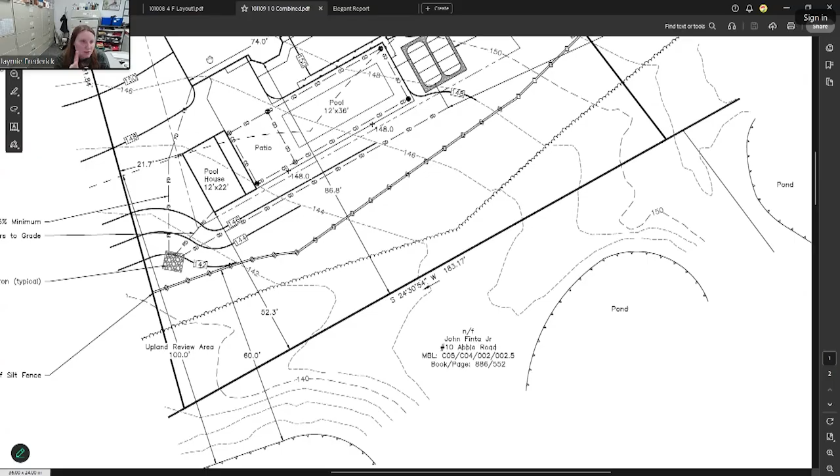A lot of them have, the two on either side came in to extend the lots, and it was reflective of the one on the north end that the commission reviewed not too long ago. So I reviewed those administratively. The two on either side do not have a pool, unlike the one the commission reviewed.

This is Commissioner Papantonis. The original plans called for 2,500 square foot houses. So we're double the size of the house, plus the pool house, plus the pool on this lot. Correct.

Yeah, I don't know. I don't think it's too much to be like, you have a resource behind you, and they like, I feel like I can see into the future.

So you would be requesting signs along essentially the silt fence, the limits of disturbance, to ensure that the lawn isn't expanded. Yeah. Is that something that the applicant would be open to? I would have to discuss it with them.

They're pretty, they're cute, they've got ducks or something on them, but it does prevent people from getting themselves into trouble later, and not doing the thing of 'I'd rather say sorry than may I.' I personally think if that's what you want, then that's what goes. However, I will say because the other lots don't have it, maybe there would be some pushback because of that. But again, if you request that, it goes on it.

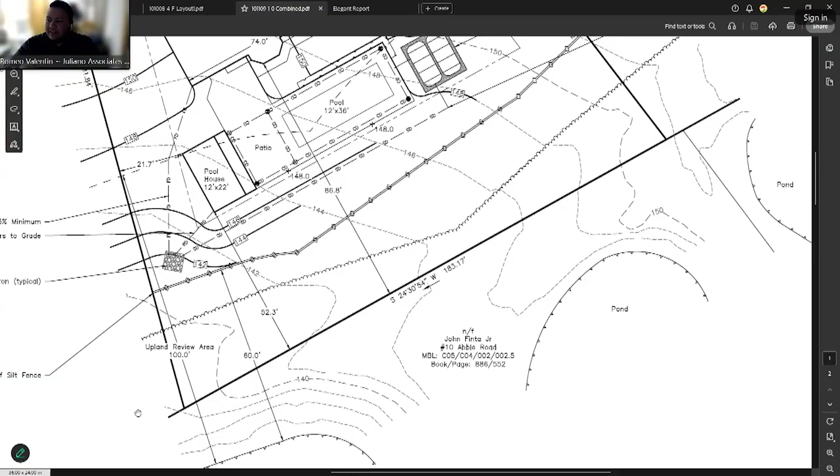This is Commissioner Bassler. What's the material, what's the vegetation between the brush line and the property line? I think it's just like overgrown grass. But again, like Jamie said, it's been cleared, so, yeah, right.

Okay, Jaymie Frederick, the Wetland Agent. So this is from an NRCS soil report, and it's a fairly recent image because you can see the subdivision erosion controls, the bare soil condition I was talking about. Obviously the property line is approximate here. You can see the ponds here, and these are the autumn olive plants that I was talking about.

So historically the property was a farm, so that's where the extent between that brush line shown on the plan and the proposed limit of lawn is. This is the proposed limit of lawn, and this is essentially the remnant vegetative line from the agricultural use of the property.

Well, and if it's helpful, we can talk about it from a wetland chemistry and pond chemistry issue in terms of further development all the way to the edge of that line. How far is the property line to that pond? Is that 20 feet?

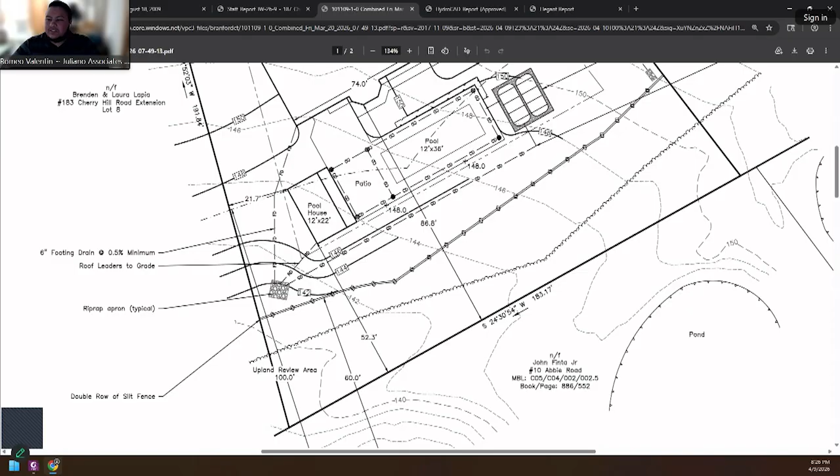definitely understand that. Commissioner Begemon again - given how sporadic that vegetation looked in the aerial, would it make more sense to say a certain number of feet from the property that those signs should be, in a line at a certain number of feet?

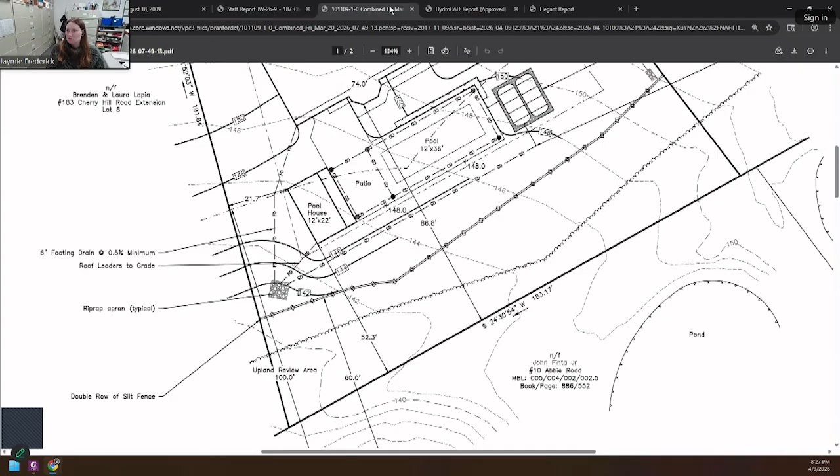I think at the edge of the existing - where's that report? Oh, did I close it? I did. I think if you do a certain number of feet, you're going to end up possibly cutting out some of that vegetation that's already there, or you're going to end up with this weird chunk that's kind of void. Whatever you think is better.

Yeah, and Mr. Valentin, you are welcome to come back with a planting plan if you like, if that makes everyone happier. Could the planting plan be approved by staff? Yeah, I mean, I would be okay with that.

Can we not have like a condition of approval to do a perc test before, to verify our numbers? Would that be acceptable? This is Commissioner Begemon, I would think that I'd be okay for staff approval if that's the only thing we're looking for, so that the numbers - and obviously if they don't work, then it comes back to us.

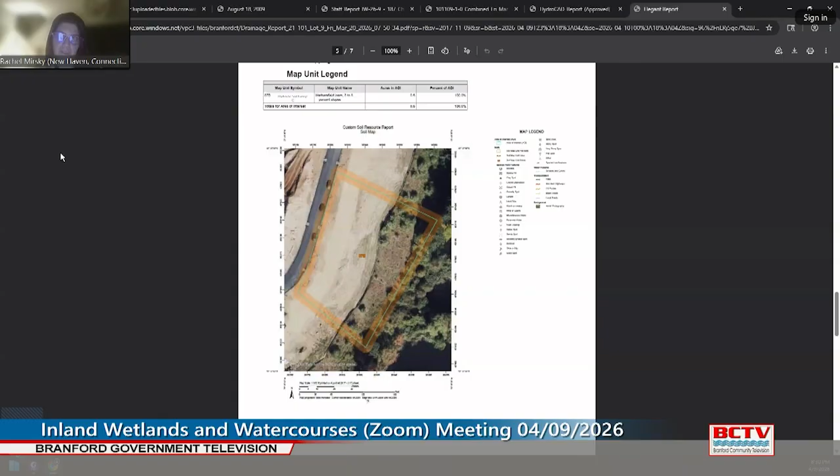This is Commissioner Mirsky, just a question. I apologize for bringing up the pool again, but I'm a little unclear. There was a lot of questions asked about the pool, and I understand Mr. Valentin doesn't know the answer. But as a commission, do we still need more information about that? Because if we end up approving this, it includes whatever that pool is going to be. Is that enough of a concern for us or not?

That was unclear to me.

Jamie Frederick, wetland agent. I think that if the commission is concerned, probably a condition that we could get more information on, potentially, since we're continuing it anyway. And if the answer's not necessarily known right now, we'd be looking to make sure that if any heavy equipment is required for bringing that pool in, it's not setting up shop right where the infiltration is being proposed.

This is Commissioner Papantonis. I agree with Commissioner Mirsky that we need more information about the pool. This is Commissioner Bassler, I think you're going to need to specify what information you do want.

Yeah, this is Commissioner Mirsky. I agree that more information is needed, but I have to admit I'm confused because I don't know, is this a legal matter? I apologize if this doesn't make sense. I don't know if the owners exactly are required to know. I mean, we see a shape here of what the size is.

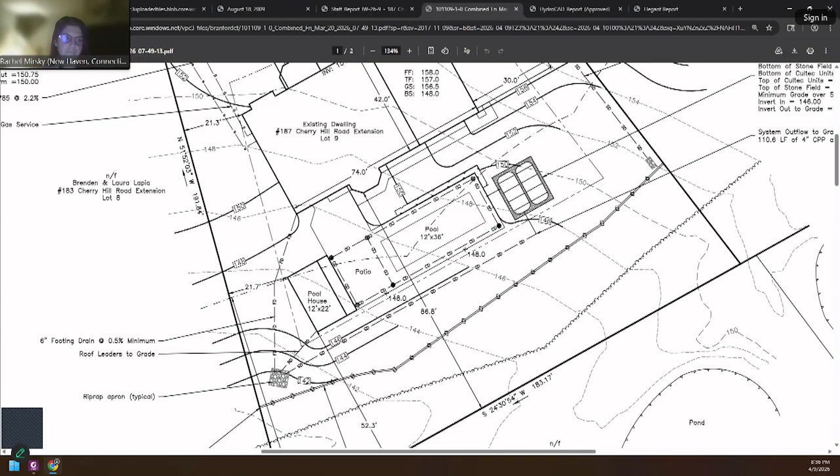This is Commissioner Papantonis. I'm just concerned because this is so much more than the site plan we originally approved. Now the house is twice as big, plus the pool, plus a pool house. And then what if they decide now to put in a hot tub too? Because they don't have the pool plan, who knows what's going to happen?

It's bothering me. Jamie Frederick, the wetland agent: they are here before us. They are changing their plans, but they are presenting them. And yes, it's different than what the subdivision proposal was. Frankly, I'm not too surprised by that. So we need to review it on the merit of what they're proposing and what they're proposing to offset.

I do see the commission's concern about the fact that it is a large development. And I think the comment that Commissioner Bolla had on signs and/or a vegetative landscape buffer to help ensure it doesn't get larger without them coming back, to make them think twice, is not a bad one.

But they can't be penalized for wanting to do something different. Yes, Commissioner Bassler, and the evidence shown even with the larger plan and the additional structures, etc., they accommodated that with stormwater management systems that, at least with the information we've received to date, do not add issues for the wetland compared to the plan that we reviewed.

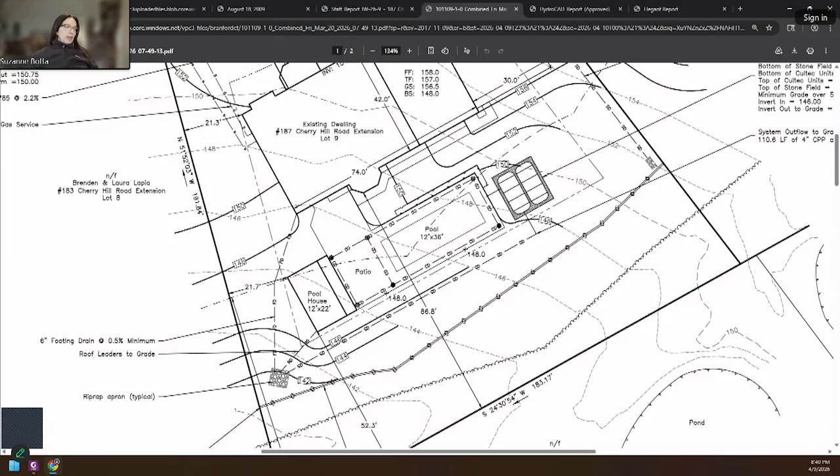This is Commissioner Bolla. I have been on the commission for a very long time, and I have learned not to assume when it comes to information like that. I mean, we can infer, but I don't think it's wise to make these kinds of decisions on inferences. Very true, I won't push back there.

That's the truth. And again, I don't think we would know that until actual construction started, unless we did those tests. The perc test is not going to tell you where the groundwater is. So we can dig some test pits and check for groundwater. Jamie Frederick, the wetland agent.

The only other thing I want to comment on is the Cultec unit for the pool is located behind where the current silt fence is installed, because that's pretty much installed at that 100-foot upland review area. So if the test was done there, erosion controls would have to be mindful if it was done prior to issuance of permit.

This is Commissioner Bassler. It seems to me with some of the outstanding issues that at this point we need to review that before considering the permit.

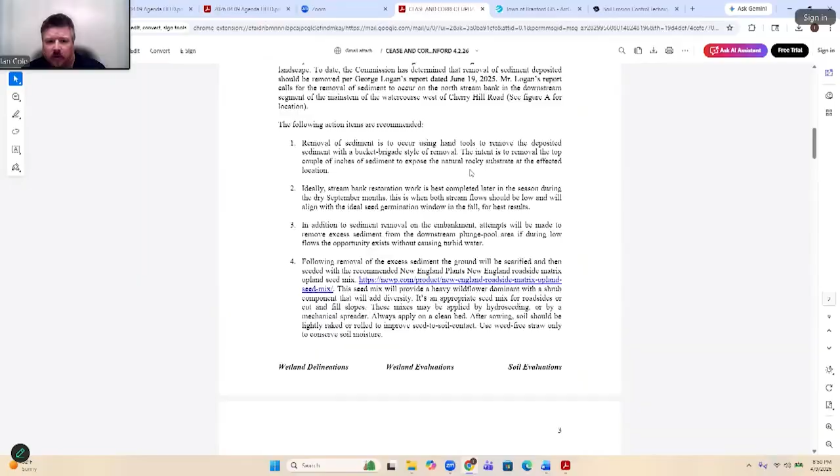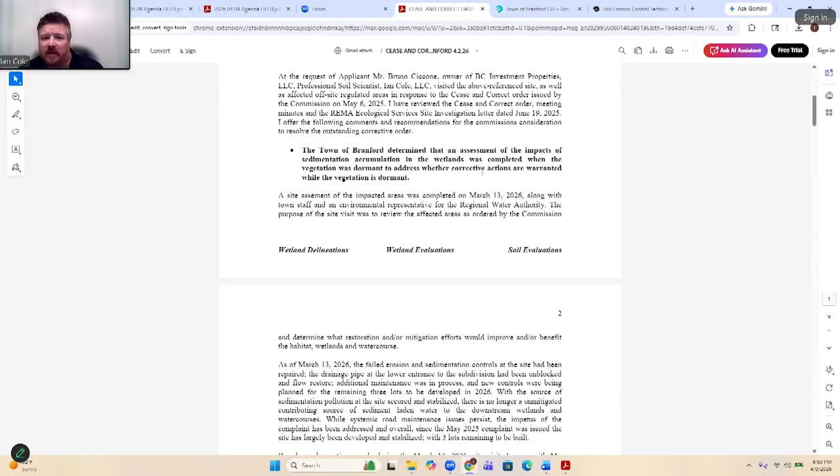In the file, the summarization of the site walk was memorialized in this March 31st report, which I believe is in the application file. Essentially, the main question asked was whether we could go back in during the dormant season and assess if there were any warranted actions to remove some of that sediment.

There's two spots identified on the site walk where some mitigation measures could benefit the wetlands. One was a little area on the side of the road where sedimentation had migrated down into the wetlands, but it would be impractical to retrieve without counterproductively taking out the vegetation. So the idea would be to clean up the roadside gutter flow, and block it with some riprap to reduce any future sediment load. With the systemic issue fixed, it's now just a road maintenance issue that's ongoing.

It's really a town issue, but the applicant understands that some of the sedimentation that migrated down there was caused by their site. The riprap at the side of the road will probably protect it from any future washout issues. But with the source of sediment being dealt with at the site, I don't foresee any future discharges down into that area.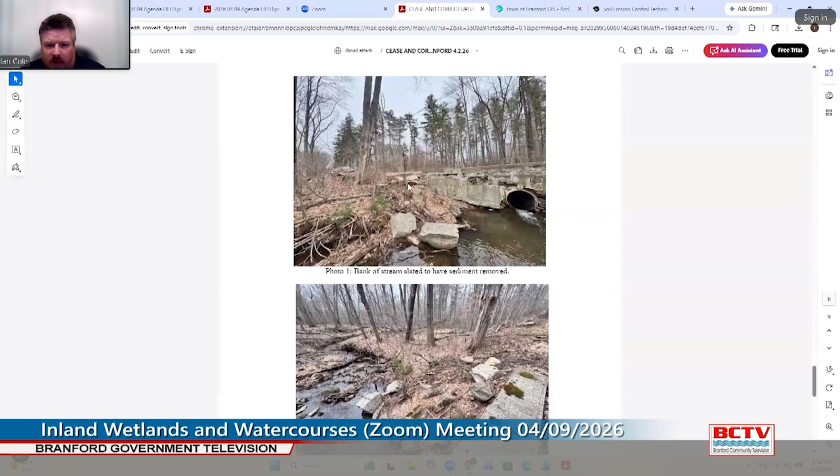Really, the heart of where the restoration activities are going to occur, and I'll go to a picture here in a second, is on this northern embankment on the downstream side of the crossing. So that area I was just pointing to, that's this embankment. If you can see in the leaf color, it's a little bit different there.

That's some sediment that came down the road and washed out into the stream. The idea identified by Mr. Logan was essentially to use hand tools, a bucket brigade, to come in and remove the recently deposited sediment, which you can see sits on top of the leaf litter. You can see the ground structure in here is pretty armored and rocky. So the idea would be to bring in workers with a bucket brigade to tease this material out with hand tools, put it in a bucket, and remove it from the site.

The idea is to take the first couple inches off and expose that rocky natural substrate. Then with a hydro seed they would put down a New England roadside seed mix, which is a pre-prescribed seed mix recommended for roadsides. It has a wildflower component, as well as a shrub component to add diversity. So they'd use hand tools to take out the sediment and hydro seed this area.

Then they would put down an erosion and control blanket designed specifically for a high energy site. Along the toe slope here, where you can see some undercutting, they would put in some coir logs for bank stability. Over time, this area would get additional vegetation and act more as a filter strip. Also at the shoulder here, it could benefit from either placed riprap or another coir log that could be put in place and left to naturally biodegrade.

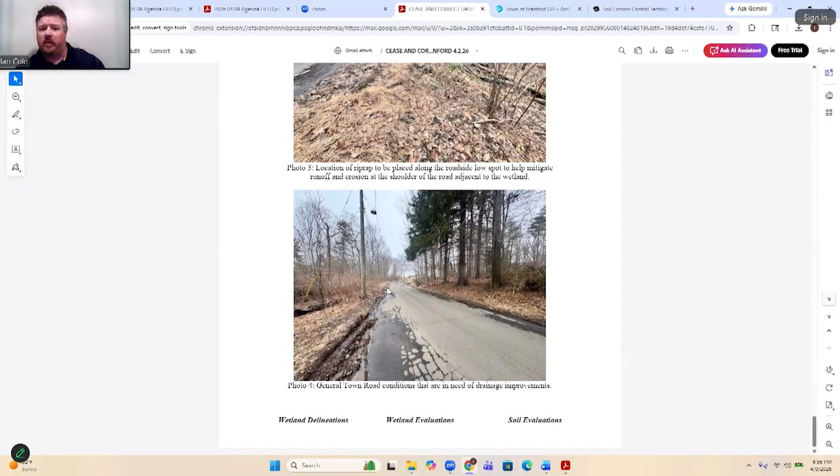So that's the mitigation. Before I move on, I'd ask to open it up to the commission for any questions they have with regards to this process.

This is Commissioner Boda. Two questions. You had said a wildflower mix, or did you say a New England seed mix?

Yeah, so in the file I included the specifications. Basically I went on the New England Wetland Plants website, and they have a bunch of pre-described seed mixes used for appropriate situations. This being the side of a road, they have pre-described erosion and sediment control mixes that will take to these kind of nutrient-poor environments, and they have components of different wildflowers and some shrubs in there. I can probably bring it up here.

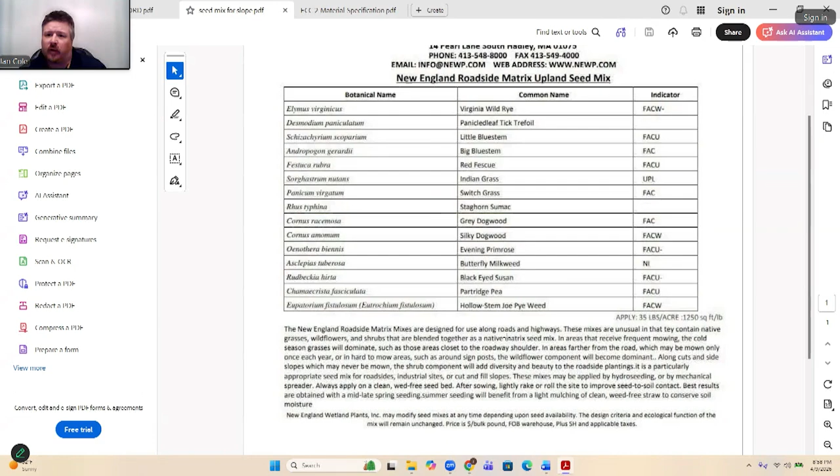Going back to the picture, this area is not very big. These erosion control blankets are basically 6.5 feet wide. You would take maybe 2 strips wide at most to cover this area from the top of bank down to the bottom of bank.

Thank you. Commissioner Boda, my second question: you said there's a fair amount of sediment in that water course, but what is generally the substrate there? Sure, so just for context, and I know the commission's probably talked about this at length previously, but it's been quite some time since the Logan material, which dates back to May of 25. But this stream itself...

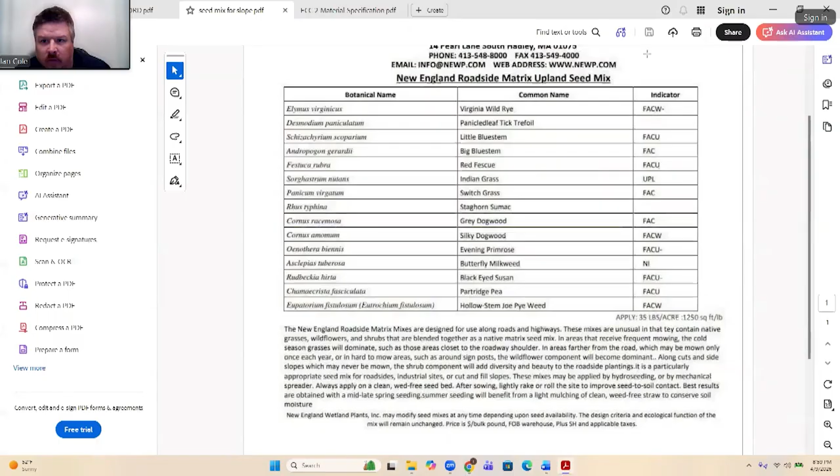has a watershed of 160 acres. Let's go to... all right, here. My screen's a little messed up, bear with me one second please. So here's the stream down here. This watershed is roughly 160 acres, and as you can see, a lot of it's pretty highly developed. Mr. Logan had provided, as commonly we run the USGS stream stats, which can spit out what the impervious surface is in these areas. So when you do it for this site, it shows you quickly there's a 160-acre watershed, 63% of it's developed, 16% of that's impervious.

So really what that points to is this stream bank has been experiencing erosion and sediment issues naturally. Regardless of that, as Mr. Logan had pointed out in his early findings, where he had done some macroinvertebrate studies, the site still provides habitat for that biotic component, such as mayflies, which are an indicator of good water quality. I think it's important to know, as we have them at the table, this site is located upstream of a property controlled by a water company, and as such, regardless if this stream was a high quality stream or a degraded stream, you would employ the same best management practices, regardless whether the stream was impaired or not. Quite frankly, I probably went off on a bit of a tangent there.

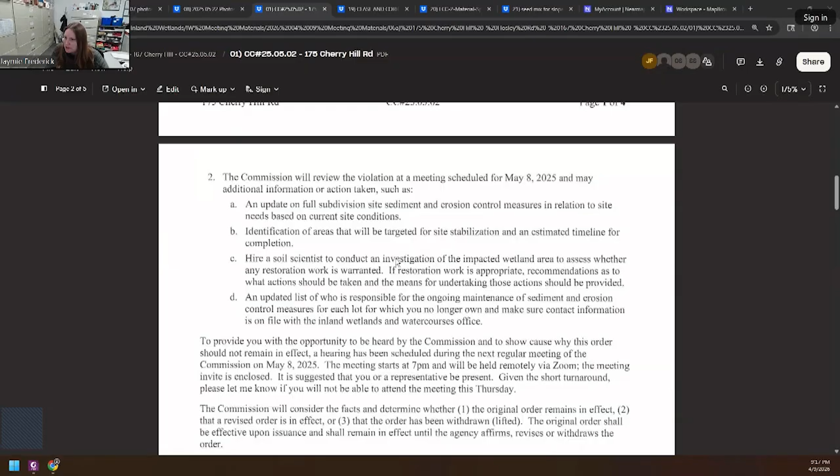The one thing I'll say is where the outflow is from the basin is not a wetland, and it's not particularly near a wetland. So I'm not really sure, though it is within the commission's jurisdiction, I would argue, because it's relative to the overall development. Let me pull up the approval for the modified basin.

Commissioner Begeman: While you're doing that, can I ask Mr. Moore, when he asked for a structure on the basin outflow, what did he see there as far as what is existing right now? You said you saw something there that you didn't like, I guess, so you said there should be like a structure on the basin outflow.

Evan Moore, Regional Water Authority: Currently it's just discharging to the ground. There's nothing there but dirt and whatever vegetation may be there, but mostly it's just a kind of a mud pit that it's discharging to. So something to stabilize the site at the very least, so it doesn't continue to erode and increase in size.

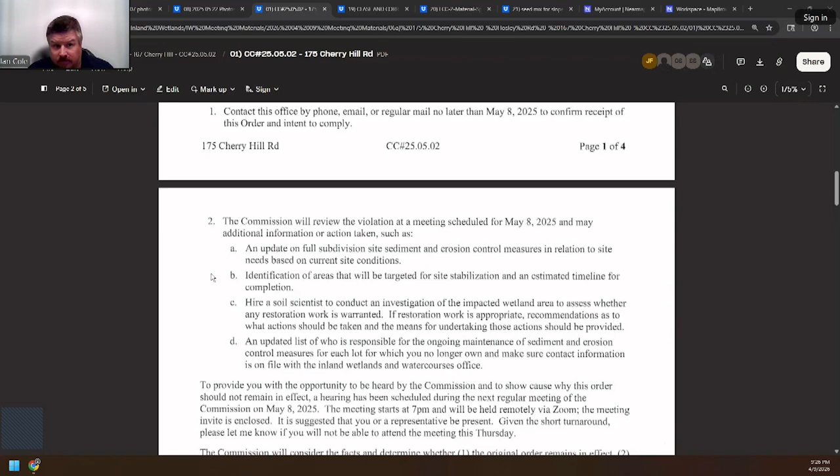Would that work for the commission? I think that is typically consistent with what the commission would look for in this type of situation. Jaymie Frederick, the wetland agent.

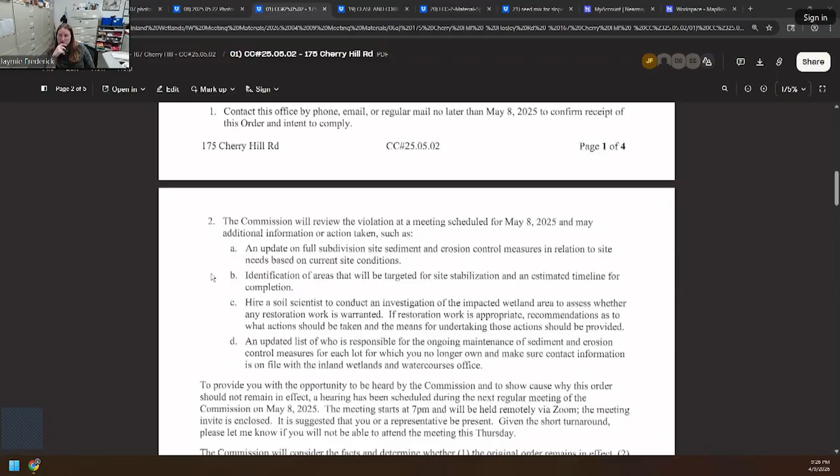This is Commissioner Bassemann. It's a little odd because of the protracted time frame, but I want to be sure that everyone's on the same page in terms of what the expectation is whenever the report comes back. So some kind of follow-up correspondence would seem to be required.

Jaymie Frederick, the wetland agent. It is fairly typical with enforcement actions in particular, but also with permits, that certain types of work can only happen at certain times. I don't know about the spring - the issue with doing it in the spring is that's going to be your highest rainfall, you're going to have more possibility of washout. And as far as any removal of sediment from the stream, it would be high flow instead of low flow. So I think it makes sense to follow the recommendation and do it right.

And if that means it takes a bit longer, the plus here is we've had the dormant inspection, so we know what the soil conditions are like, when you can actually see the ground cover. We have a plan ready to hit the ground running in September. Then the commission can see what the memo due in November presents, and you can make a determination that it's satisfied, or you can say, okay, we want to follow up in the spring because, yes, you've seeded, yes, you've put down the erosion control blanket, but we're really not seeing much vegetative establishment yet.

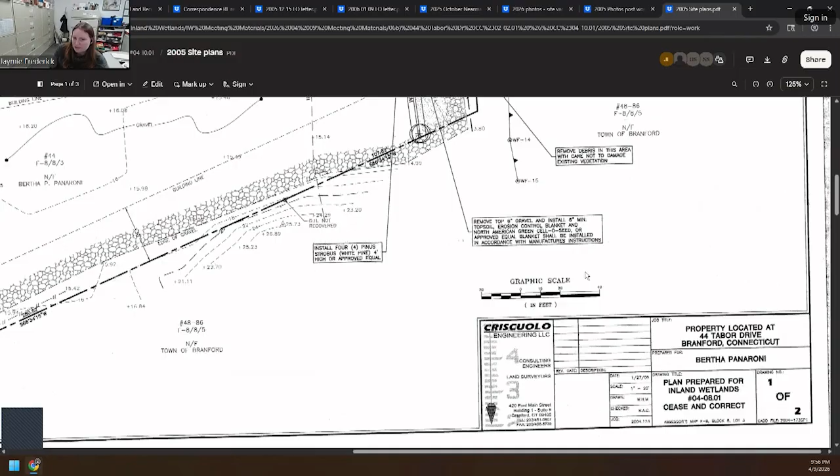Until it's documented that compliance with the vegetative buffer and berm and plantings per the plan dated January 27/05 has been implemented and inspected, at which point it would be able to issue correspondence to that regard, Jamie? Yep, I can follow up with an email to that effect. And then once that work's completed, it could come back to the commission for lifting of the order.

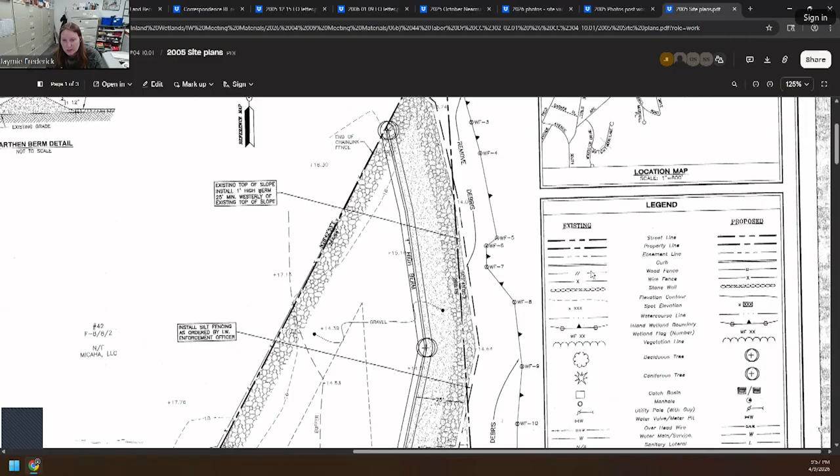Prior to closing that out and moving on, I would just like to provide the opportunity for questions, comments, concerns.

This is Commissioner Begeman. When we do these, do we usually have that 85% survival rate, a 3 to 5 year monitoring and all that?

Well, so here's the thing. The order's already been up. We're kind of working within what has already been determined by the commission. So what we're looking at right now might not be what we would expect today. I do think we have to respect the terms of what was agreed between the commission and the property owner at the time. So there's been a little bit of back and forth as far as where the site has been in compliance.

And you're ultimately looking for it to be compliant with the plan that was submitted in 2005 in order to be able to lift the order at this point, with the encouragement that a native conservation seed mix be used, in consideration of appropriate trees that are tolerant to site conditions be planted for the longevity of those plantings on site. And it's in the property owner's interest to plant something that's going to survive, and that the berm be installed.

We can't add on new requirements. So I would say the only other thing you could require is a site plan, but at this point the site is vacant. So essentially this 2005 plan arguably is the site plan.

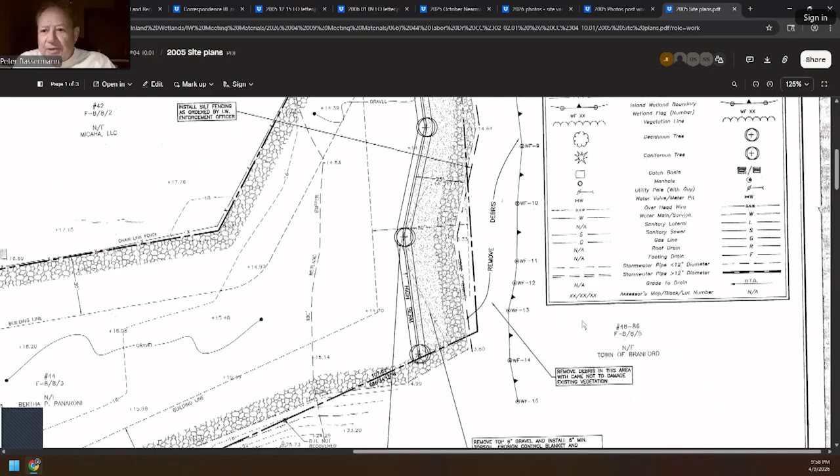Sounds good to me, Commissioner Begeman. Any questions or any questions that you want to raise, or clarity, issues of clarity?

So I just want to understand what you're asking. In order for the cease and correct order to be lifted so that we can have our closing, we need to provide topsoil, seed, trees, whatever you're recommending. And once that's done, we can come back to the commission for another site review to see that that was done, and then the cease and correct can be lifted.

That seems to be the course of action. The recommendation to the commission could be made that the cease and correct order be lifted. It would have to be lifted by the commission. Their next meeting is April 23rd, and then they also have a meeting May 14th. They meet every second and fourth Thursday of the month.

I would also just point out that the site plan does call for erosion controls prior to placing topsoil. Whether, since you're just doing a minor amount of material, it'd probably be a straw wattle rather than a silt fence to prevent further ground disturbance. But we just want to make sure that there's no migration of material while that seed is establishing, whether they are hydro seeding, sodding, whatever approach they decide to take. We just want to make sure there's no migration of material.

So to keep that in mind. And again, any existing vegetative buffer that does exist can be used as credit. You don't have to undo to implement this plan. You just need to supplement as applicable.

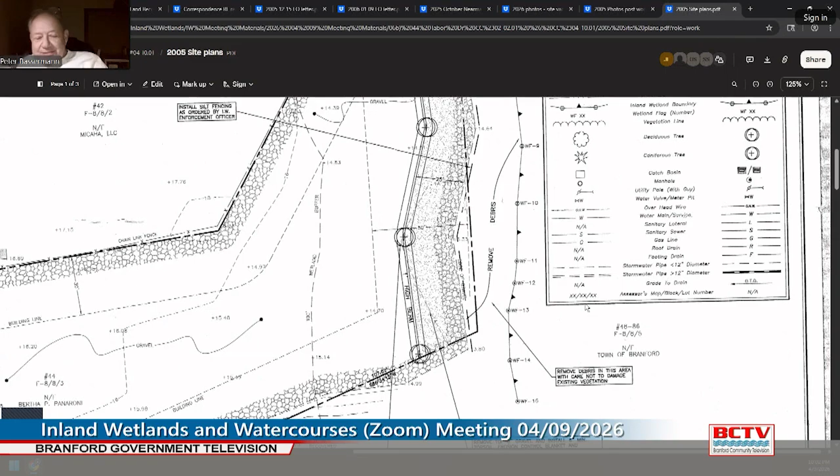Sounds good. Let's hope next time we meet, temperatures are more in the 60s and 70s. Thank you for your attendance and participation.